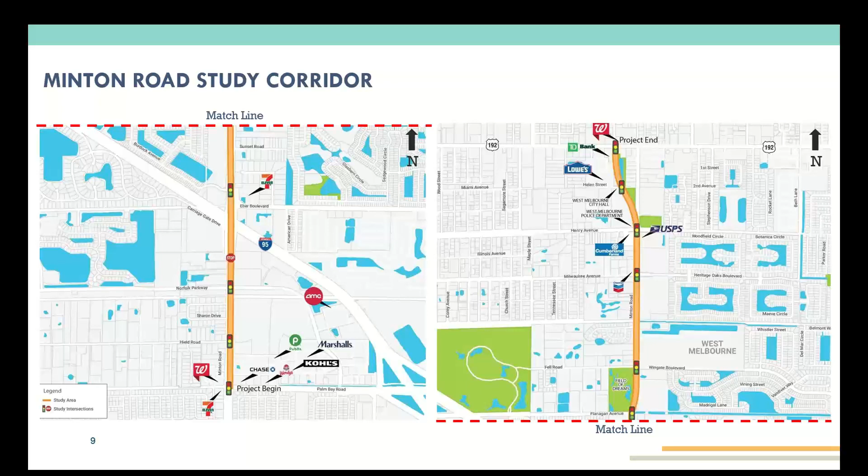So the goals of the project - the first one, right off the bat, was there was a potential need to widen the road from 4 to 6 lanes. There had been right of way, or property set aside, to be able to widen the road from 4 to 6 lanes if traffic volumes were high enough where it was needed.

We went through the process with our local agencies - City of West Melbourne, Brevard County, Space Coast Area Transit, and Palm Bay - and sat down with everybody to discuss what we want the future of this corridor to look like. Through that process, we determined that widening to 6 lanes isn't necessarily the direction we wanted to go.

Typically, your 6-lane roads are going to be higher speed, and they're less pedestrian and bike friendly.

They've been shown to have higher crash rates than other, maybe 4-lane facilities. So there was a consensus from that group that we were not going to explore widening alternatives at this time. We were going to really focus on ped-bike enhancements along the corridor, improving safety for peds, bikes, and vehicles, and also hoping to reduce congestion along the corridor.

We know that there are some hot spots, so we're going to do some intersection improvements to help facilitate that as well, which feeds into the second bullet. And then the last part, last but certainly not least, is enhancing those multimodal facilities throughout the corridor—pedestrians, bicycles, and transit.

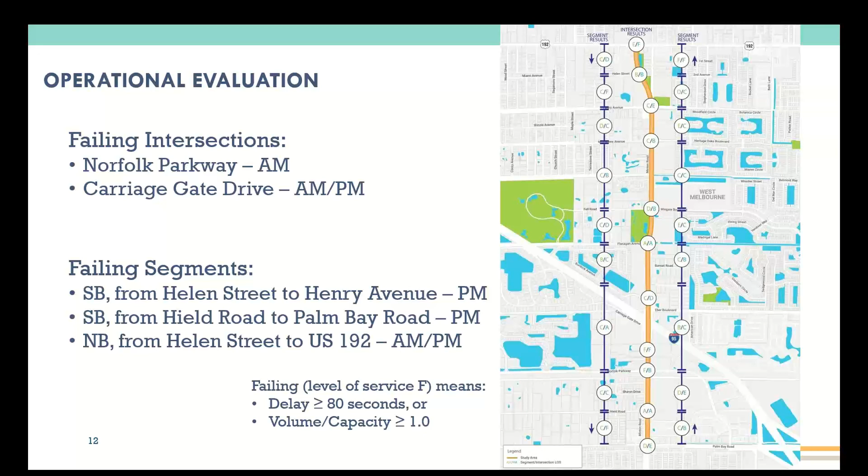We'll talk a little bit more about those issues here in a few slides.

So a little bit on crash history as well. Beyond the operations, we also look at safety data. We've had a little bit over 1,000 crashes. We looked at 5 years of data, from 2014 to 2018. Now you may be wondering, how is that significant, or is it significant? Is it not significant?

Generally, from what we've seen, the amount of crashes that have happened along this stretch of Minton Road are a little bit higher than what we would typically see for a similar type of roadway. This is also ranked 19th on what we call our state of the system report in terms of crashes at the segment level—top 19, I guess, in the county. So definitely some safety issues we want to try to address through this planning study and the alternatives we're going to move forward with.

One of the big things to note is that a lot of these crashes are happening during the PM, what we call the PM peak hour—5 to 6 p.m., when people are getting off work. We had about 10% of our crashes occur during that 1-hour time period throughout the 5 years of crash data.

And then a little bit on locations as well—these are some of our hot spots. As you would imagine, some of our bigger intersections show up. Palm Bay Road had about 260 crashes at that location. US 192 at the north end of the corridor was our highest crash location with over 300 crashes over those 5 years. Then we have a few spot locations—Hield and Helen Street, both close to 30 crashes. And really in the middle of the corridor, Milwaukee and Henry are two of our highest locations, with 46 and 81 crashes respectively.

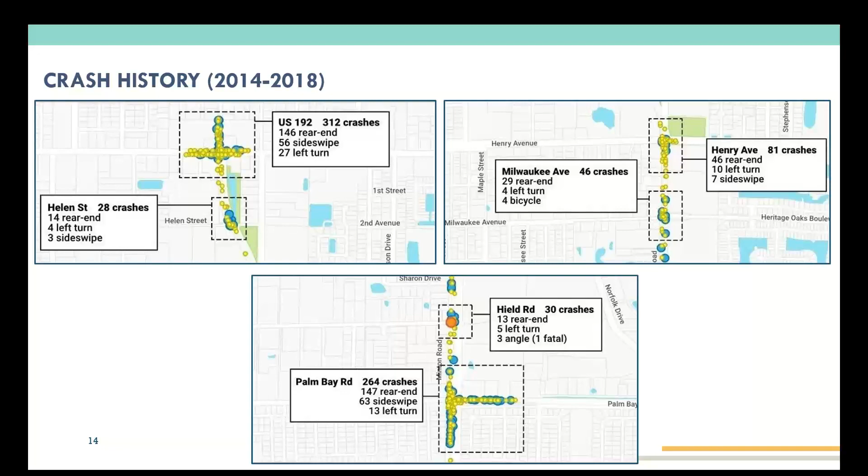So in addition to vehicular crashes, we also want to take a look at pedestrian and bicycle crashes, and see if there are any specific areas or locations we need to address from a ped-bike crash standpoint. Overall, we had 5 pedestrian and 10 bicycle crashes along the corridor. The big statistic that jumps out is that 9 of those occurred within crosswalks.

So these are folks either using the crosswalk on their bike or walking, and they're getting hit by a vehicle. Whether who's at fault, we didn't really get into that level of detail, but we do know those crosswalks are supposed to be protected and safe spaces for pedestrians and bicyclists, and that's where we're having most of our crash issues. Looking along the entire corridor, the Milwaukee Avenue, Heritage Oaks Boulevard location—that signal was our highest crash location from a ped-bike standpoint.

So we had 5 total crashes there. When we went out and did field reviews, it was also echoed by the crossing guards at that location that it's a very unsafe location, perceived unsafe location for pedestrians using that intersection. One of the crossing guards almost got struck by a vehicle turning left out of one of the side streets when we were out there observing it.

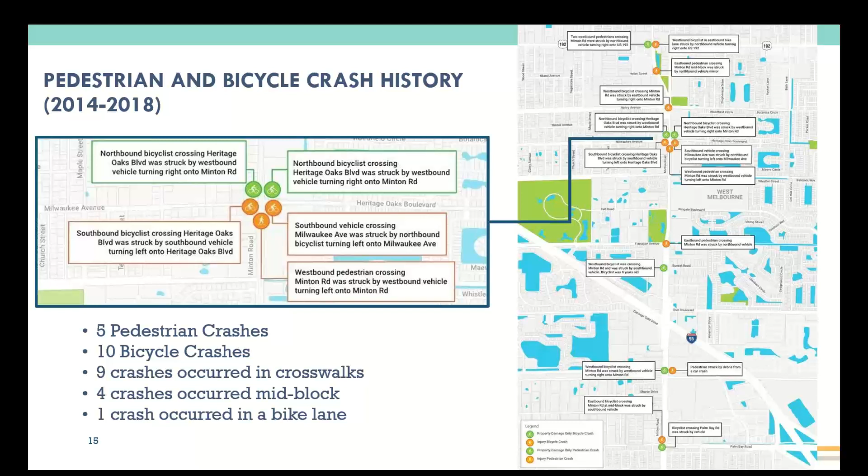And then you have a lot of kids interacting at that location as well. So it'll be one of the locations that we emphasize moving forward here, discuss later in the presentation.

So now, once we've gone through and done our existing conditions analysis, we identify issues and opportunities. And like I said, this springboards us into what alternatives we want to look at along the entire corridor. Starting with multimodal - pedestrian, bicycles, transit - we have what we call pedestrian mobility emphasis intersections, which also turns into mobility slash safety. Every signalized location along the corridor is going to be an emphasis for pedestrian safety and mobility as we progress further on the project.

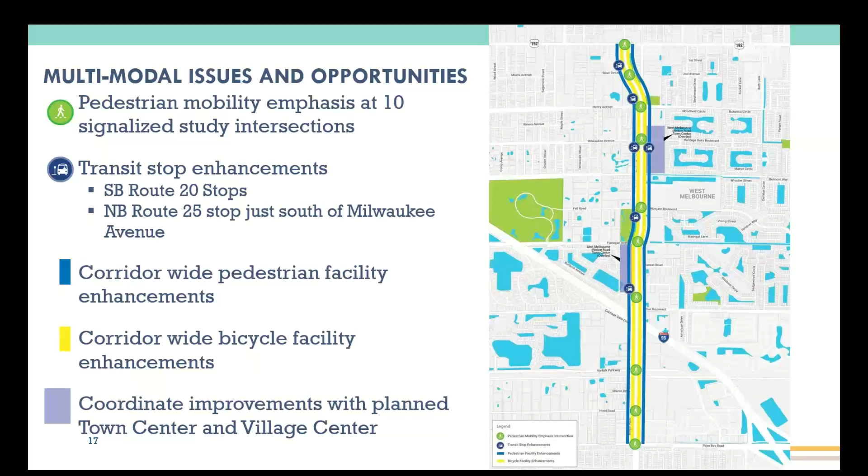Transit stop enhancements as well. There are transit stops along the whole corridor. West Melbourne does a great job of upkeeping those, putting out shelters. So we want to enhance those for whatever roadway alternative we want to implement along the corridor. Like I've mentioned before, pedestrian facility and bicycle facility enhancements as well - things we're also going to take a look at and talk about here in a few slides.

Some other issues and opportunities - we have some spot locations where we want to look at operational enhancements, and we've identified those. Then we have safety emphasis intersections - these are intersections with 50 or more crashes: Palm Bay, Eber, Henry, and US 192. All ones we want to emphasize moving forward in our alternatives development.

And then we think there's an opportunity for lighting as well. There are a few sections along the corridor that have recent lighting installments - they look really nice, really well lit, you're very visible at night. And then there are other spots where it's completely pitch black and you can't see anything. So we're hoping to implement lighting along the corridor as well.

On the vehicular side, like I mentioned, the queuing or congestion, the stacking where you're waiting at a signal - we saw a lot of that when we were out there. In the AM, going northbound, pretty much from the I-95 bridge up to Wingate, that was really one of your big problem areas with the school and the interaction with the school kids and the crossings going on there at the intersection.

And then in the PM, it's the opposite - you're going southbound, and it really all backs up from Palm Bay Road. That's what we were seeing in the PM. We also had some issues along Henry as well - folks were struggling to get out in the afternoon, going westbound to get out onto Minton Road.

A couple other things we want to take a look at are utilities and drainage facilities. Those are really going to play a factor into what roadway alternative - like I said, we'll discuss that here in a few slides - that we implement along the study corridor.

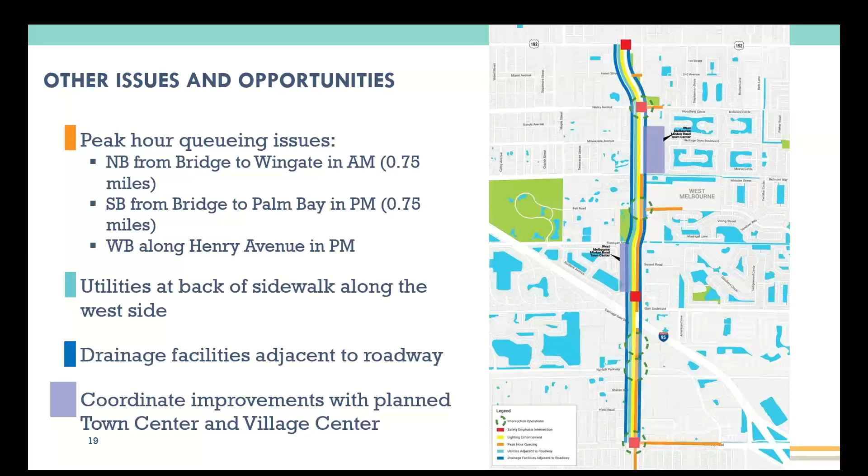So like I mentioned, we'll talk a little bit about roadway alternatives. Before I get into the actual alternatives, we need to explain what's out there today. If you drive this, walk this, bike this regularly, this should be pretty familiar to you - you have 2 lanes in each direction, 2 going northbound, 2 going southbound. You have what we call a raised median, and curb and gutter on the inside.

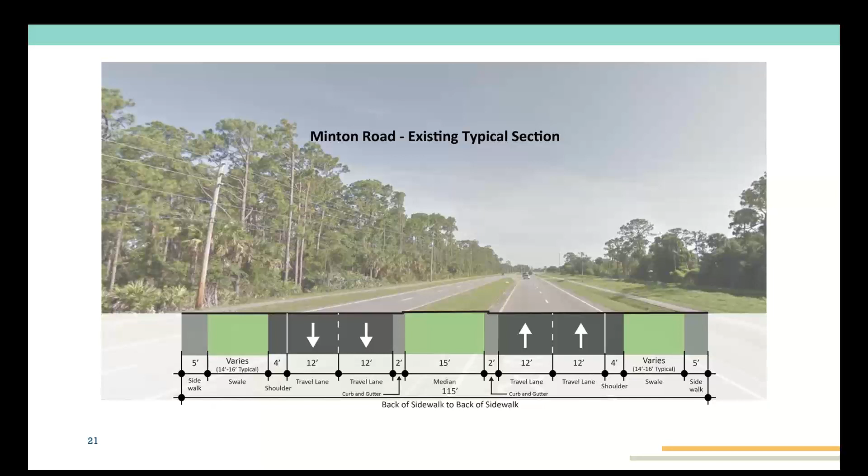That's the 2 feet curb and gutter you see there on the inside median. And then once you go to the outside, you have a 4-foot paved shoulder that then goes down into what we call a swale - this is where all of your roadway water, when it rains, drains off into this swale and then goes into drainage facilities along the corridor. Outside of those swales, you have sidewalks, about 5 feet wide in most locations along most of the corridor.

So what do we want to change? We have 4 different alternatives that I'll walk you through. Like I said, we'll go through the website here towards the end. You can actually get on the website and vote for what alternative you like the best or what you want to see implemented. So these are kind of critical slides that I'm going to walk through here.

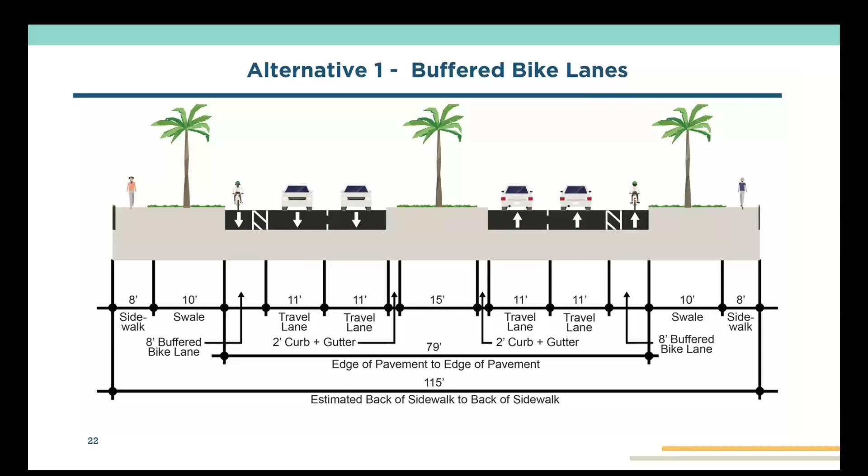Alternative number 1, buffered bike lanes. This is probably going to be the least impactful or least costly alternative of the 4. We'll build up to the most costly here at the end, but really the easiest improvement to make is to take that paved shoulder and make it a little bit wider. You're paving into the swale a little bit more, and then you're putting in what we call a buffered bike lane. That's just a bike lane, probably 5 or 6 feet wide. Then you have a striped out area between the bike lane and the outside travel lane, which provides a little bit of protection for that bicyclist. As part of this alternative, we would also be widening the sidewalks to 8 feet from the 5 feet that it is today.

Alternative 2 would be shared use paths. What this is, you'll see to the outside we've widened the sidewalk from 5 feet to 12 feet. This provides enough space to accommodate both pedestrians and bicyclists outside of the roadway. We know that with the travel speeds out there, it's posted at 45 but people are driving probably a little bit faster. We want to make sure we provide a comfortable environment for bicyclists, so we're pulling them off the road, keeping them separated from the vehicles on the roadway, providing that safer space for them to the outside.

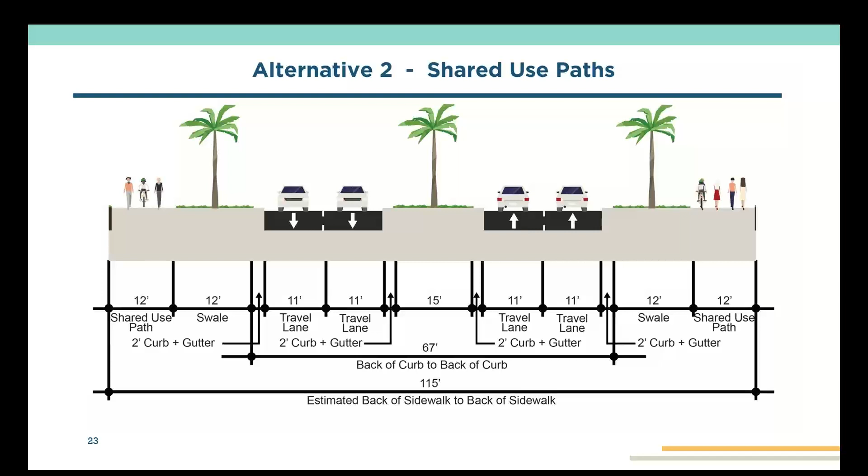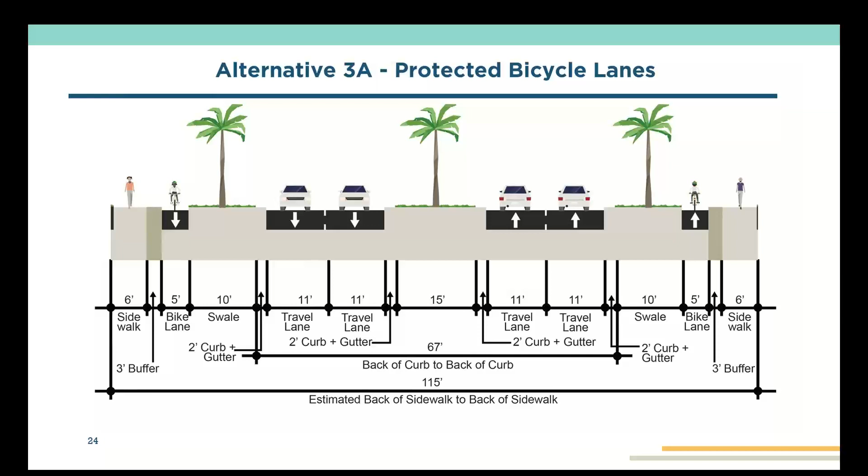Another variant, what we call alternative 3A, is protected bicycle lanes. What makes this a little different than the shared use path is that it actually provides a paved surface for bicyclists to travel at faster speeds. On a shared use path it's concrete, so you may not be able to ride as fast as you'd want or as fast as you could on asphalt in the roadway. This provides that 5-foot paved surface for the bicycle facility to the outside. You're on the other side of the swale, so you're still removed from the travel way. Then you'd have a separation or buffer between the cyclist and the pedestrian facility, the sidewalk, which would widen to 6 feet on the outside.

And because there was a 3A, there has to be a 3B, and this would be the cycle track alternative. As you'll see on the right-hand side, we have what we call a cycle track. This is a 2-way bicycle facility on one side of the road. It has enhanced bicycle features so that when you approach intersections or driveways, you as the bicyclist know you need to yield to vehicles, or vice versa, where if you're at a driveway the vehicles know they're approaching a cycle track and need to yield to the bicyclists.

One interesting thing with this concept is that we would shift it to either the west or east side of the road, depending on where we're at along the corridor. We were thinking about implementing this alternative just north of the I-95 bridge at Eber Boulevard. It would be on the west side, potentially connecting to some new town center properties that may be developed there. There are some vacant parcels, and the Field of Dreams parks on the west side. So you'd have that cycle track on the west side from Eber up to about Wingate. Then at Wingate you would cross over to the east side of the road and go in front of the schools along Minton Road, taking it from Wingate up to Milwaukee. What we were seeing is you'd want to connect the different land uses along the corridor on the west and east sides in those different sections, and also consider where students come from when they're coming to and from school.

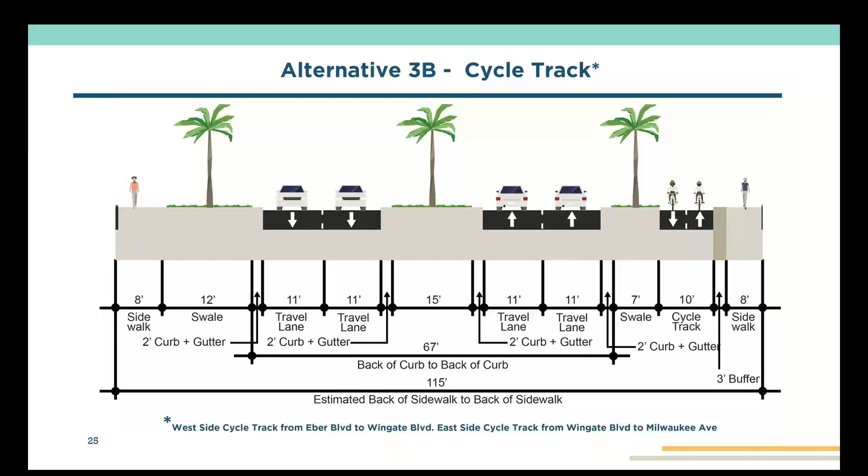For folks that may not know what a cycle track is, or if this is their first time hearing about it, it is a physically separated facility from both motor traffic, and it is separated from the pedestrian sidewalk as well. It is distinct from a sidewalk. You'll see from these pictures, you have that asphalt surface for the bikes, with striping for the bicycles, separated from the sidewalk pedestrian facility.

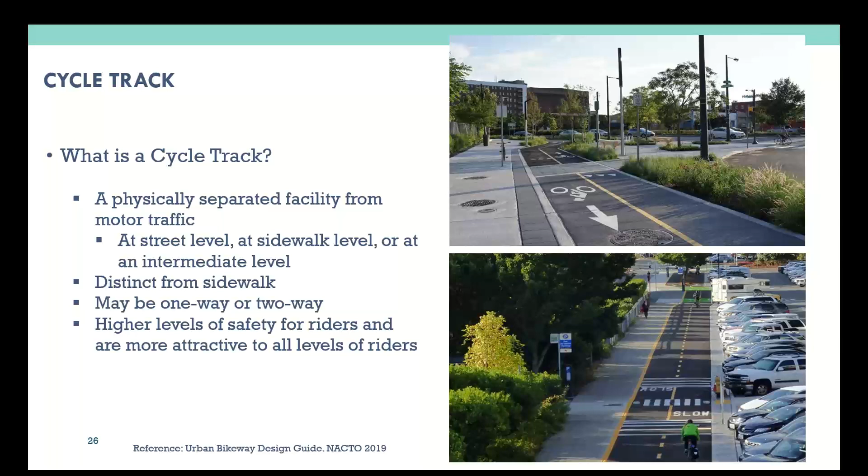Where we get into some things we're going to have to be thinking about - I don't necessarily want to call them issues, but things to consider as we move forward - we may need to purchase property at the intersections. We'll talk about that in a few slides on where those locations may be.

The drainage impacts are going to be pretty high for each of these, because you're going from an open swale to now having to figure out what you're doing with the water - do you put in curb and gutter to help close the roadway in, as we like to say. But there's going to be some drainage impacts with the different alternatives we're looking at.

Utility impacts are probably pretty low. Those are all outside of the sidewalk, and we're doing all our improvements within the sidewalk.

Like I mentioned, we typically present alternatives from low cost to high cost. So those buffered bike lanes, alternative 1, are relatively low cost. You add some pavement, all the way up to your cycle track or protected bike lanes, which are alternatives 3A and 3B, which are going to be more costly improvements.

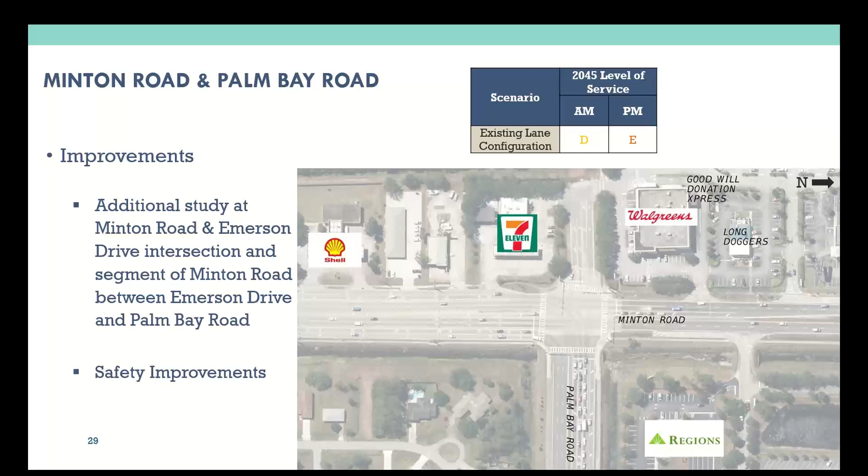I know that people don't like doing a study to recommend another study, but we think there needs to be a more comprehensive approach to looking at how this intersection operates within the Emerson Drive, Minton Road segment and intersection. So we're going to recommend a follow-up to do a more detailed analysis on that area.

So moving up the corridor to Hield, this intersection operates pretty well. Like I said, A is good, F is bad. This is level of service A when we're looking out 20 years in the future with higher volumes.

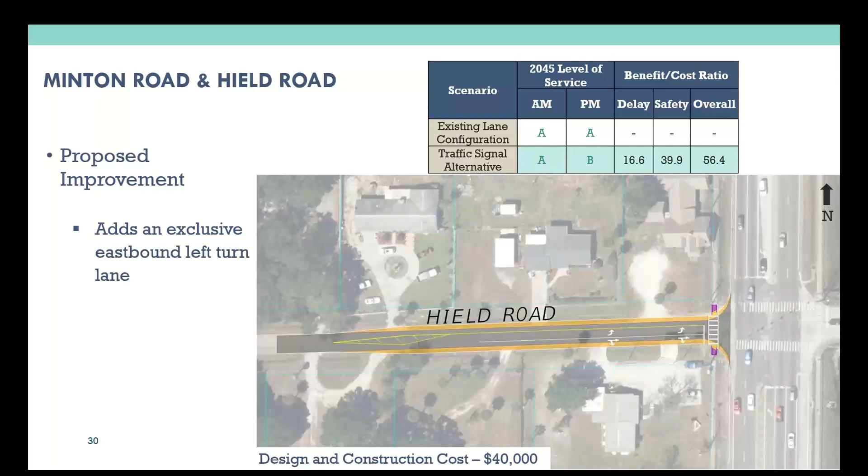There was a request by our local agencies to look at adding a new left turn lane for this eastbound approach. We've drawn that up here, you'll see it on the screen. We don't anticipate any right-of-way needed, which is great, so we'll be able to fit this within the right-of-way with pretty minimal impacts overall. It does actually enhance the intersection as well, so we'll hopefully be looking to get this incorporated.

So moving up to Norfolk, this intersection is potentially a very big location. There's going to be a lot of traffic volume potentially going through this intersection in the future. There's a lot of development going on out to the west, and so to account for all of that future volume, we're going to be looking to add a second eastbound left turn lane.

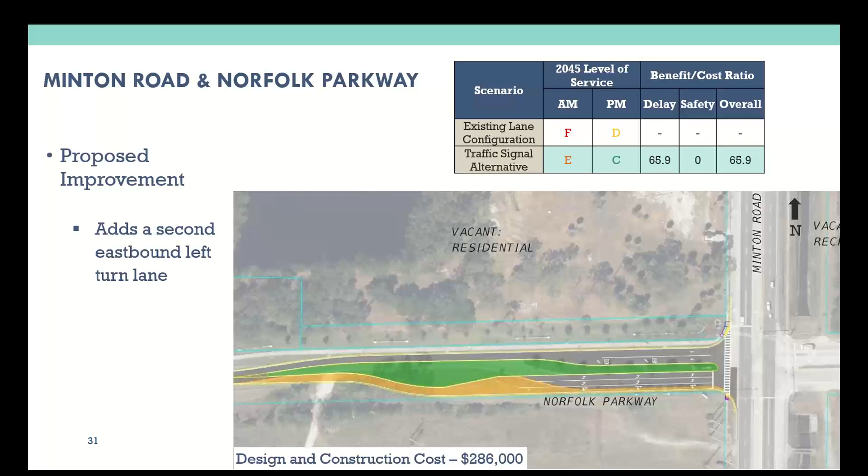You'll see everything in orange, that's essentially new pavement. We'd be shifting the road down to help line up those lanes a little bit better. And then as you approach the intersection, you have that second eastbound left that would help you go north onto Minton. As you'll see, it actually improves our operations at the intersection pretty significantly.

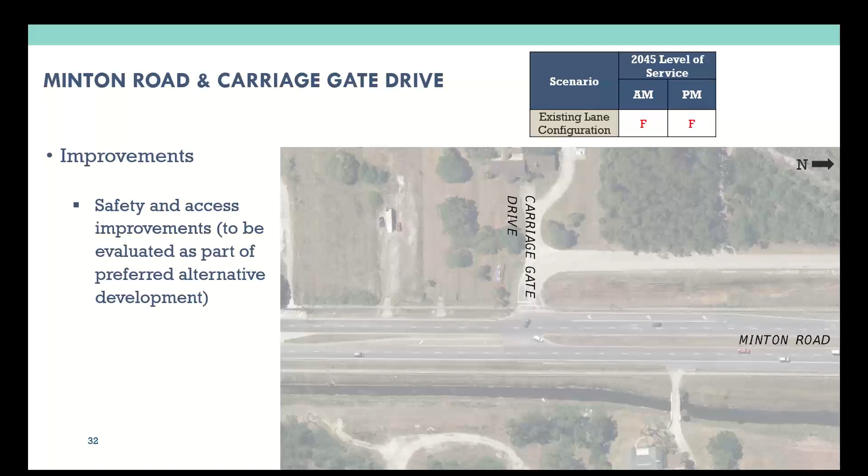So Carriage Gate, this is an interesting location. It's a tough intersection, being right at the bottom of the I-95 bridge. It's a location that we don't have anything really drawn up for yet, or a concept developed, but we are going to be looking at safety and access management improvements as part of the next part of our study. You'll be seeing more on that at our next public meeting early next year.

So Burdock and Eber, we are looking at adding another westbound left turn lane, a second westbound left turn lane at this intersection. That was identified as one of our critical movements at this location. It's a little bit tricky—you have those pretty significant 90-degree bends in the roadway, and some drainage facilities that we had to watch out for as well.

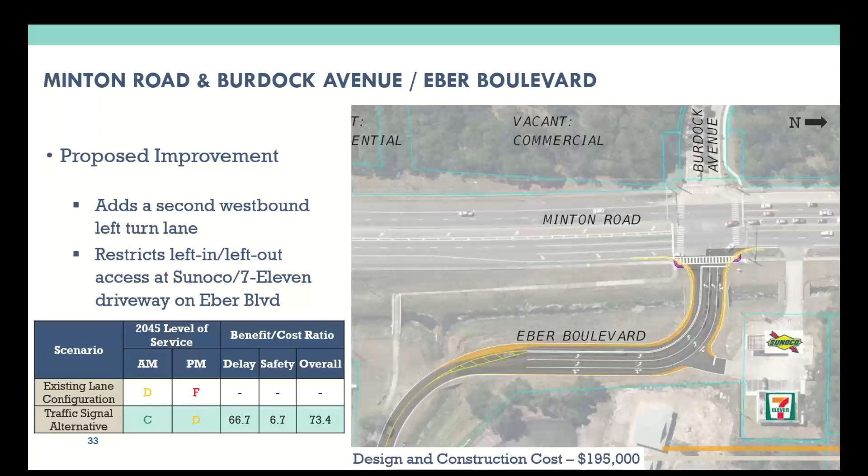But what we were hoping to do is add that second westbound left turn lane, and then add a 2-foot raised median between the left turn lane and the opposing eastbound through lane. That would help reroute some traffic and improve safety, specifically for the driveway to the 7-Eleven. Right now folks are making a left turn either to or from the 7-Eleven across the left turn lanes that are there today, and you have some sight distance issues because you're coming around a curve. So we want to help clean up that access and make it a little bit safer for folks going in and out of the gas station from Eber.

So what does that mean for access? We want to take a look at how we're impacting folks getting to and from their property. As you'll see, entering the 7-Eleven really doesn't change a whole lot. So instead of potentially using the driveway down on Eber, folks would then just have to use Minton to take the driveway located just north of the intersection.

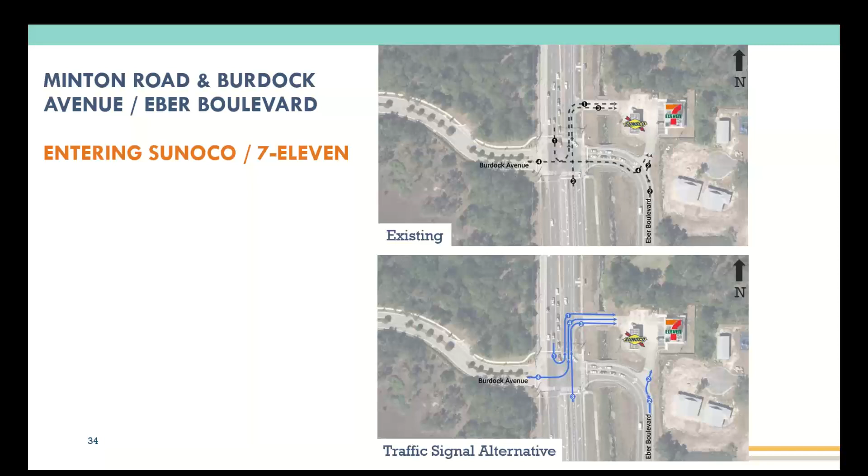Where it does play a bit of a factor is for the folks currently making the left out from the 7-Eleven to go east or south on Eber, away from Minton Road—folks who take a left, cut across those couple turn lanes, to then go south on Eber.

That median would restrict that access. Right now, we're showing a pretty conservative approach where folks would have to come out of the driveway on Minton Road, go up, make the U-turn at the next directional median opening, then come back and left turn at the intersection to go down Eber. That's a pretty conservative approach.

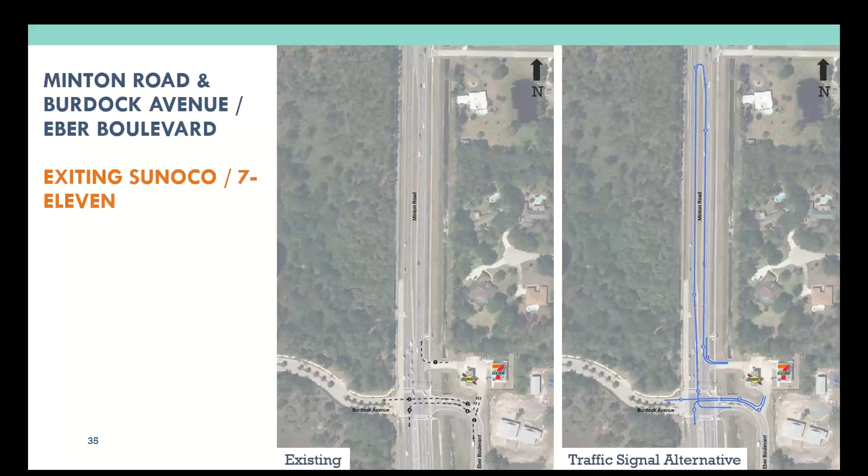We're going to look at some alternatives to help shorten that impact so folks aren't driving 10 minutes out of their way to go to the 7-Eleven if they're heading back down Eber Boulevard. So moving up the road to Flanagan and Wingate.

These two intersections were actually operating pretty well. The major issue at Wingate in the morning, and the reason for all the congestion, is the school. What's going on is kids coming up, and you're getting a pedestrian cycle where a pedestrian is using the crosswalk across Minton. Pretty much every single red light, there are pedestrians crossing, which increases the time to make it through that intersection.

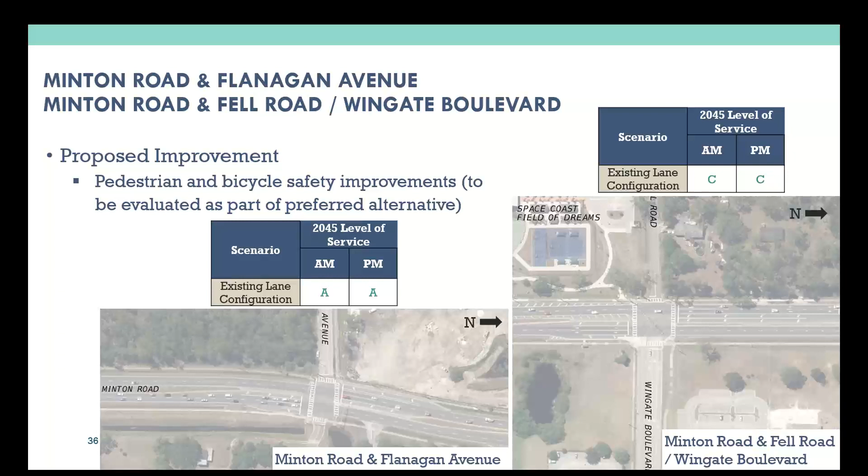From a turn lane standpoint, adding left turn lanes or doing different things like that, we weren't seeing much benefit to implementing those types of recommendations. So instead, we're going to focus on pedestrian and bicycle safety improvements at these locations, enhancing it from a ped-bike standpoint. Hopefully with all the other improvements along the corridor, it'll help enhance vehicle operations, and at this location we're really going to target that ped-bike safety.

So then moving up to Milwaukee. This is a little bit of an interesting concept, one most folks probably haven't seen before. This is what we call a restricted crossing U-turn intersection. If you drive through this intersection coming from Milwaukee or Heritage Oaks Boulevard, as the current concept shows, you won't be able to make a left turn out of those side streets, or travel straight through the intersection to go across Minton Road.

This provides a much safer intersection for all three types of users. For vehicles, it's much safer, and for pedestrians and bicyclists, it's also safer. As I mentioned, this was our highest ped-bike crash location along the entire corridor. While we want to emphasize ped-bike safety, we also want to help vehicle operations, and with this configuration, we do enhance those vehicle operations. We help out that ped-bike safety. Overall, it's a better concept for the intersection and for the location.

The one thing you'll see is when you make those right turns out, you'll go down to where those orange lines are for that turn lane, both north and south of the intersection, then make a U-turn to go back south or north. Essentially, instead of making a left, you make a right and then a U-turn to get to your destination. Those locations would be signalized, so you wouldn't be trying to make a U-turn with all those vehicles on Minton Road opposing you. You'd be able to get out and make the U-turn pretty effectively and efficiently, and it's a much safer movement overall for vehicles.

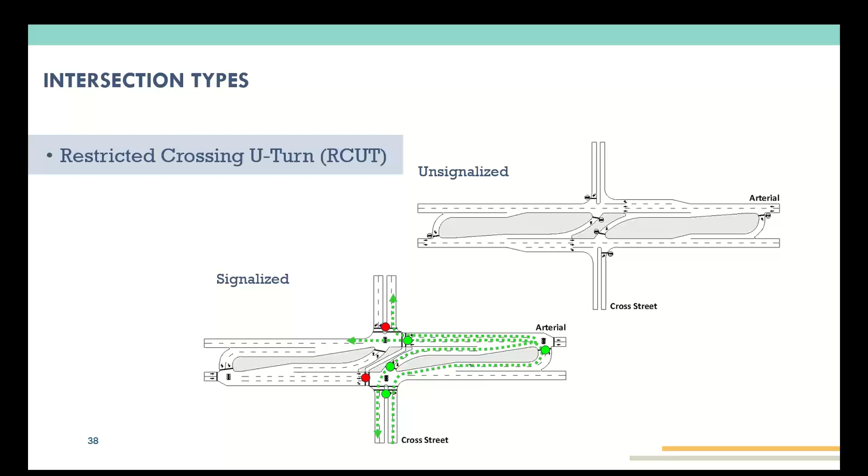Overall, it definitely increases your operational efficiency. Vehicles move through the intersection a little faster and easier because you're not being conflicted with everything coming from the side streets. You're limiting the amount of conflict points, which makes the intersection much safer as well. On pedestrian and bicycle movements, it's also safer — we were having issues with folks making left turns out of Milwaukee Avenue and Heritage Oaks Boulevard, either near misses or actually hitting pedestrians in those crosswalks crossing Minton Road.

So as you'll see, you essentially eliminate that conflict with this alternative. Now you don't have vehicles making a left turn out, so you don't have that interaction with pedestrians and bicyclists, and they're able to make it across Minton Road in one movement. You'll see in the middle that diagonal crosswalk striping, so they'll be able to make that movement without any interaction with vehicles. It really just helps the whole environment for pedestrians and bicyclists.

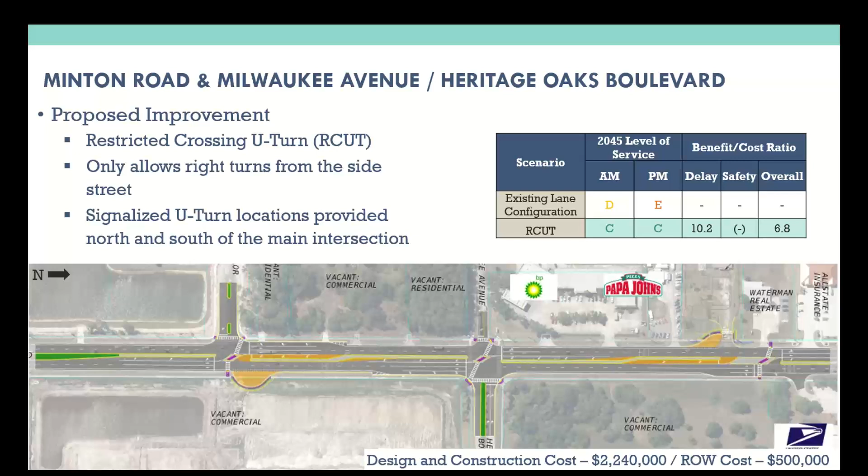The other nice thing is that for the U-turn locations to the north and south, those little orange areas also include pedestrian crosswalks. So we'd be adding more opportunities for pedestrians to cross Minton Road. It would be signalized, so it would be protected, providing that safe crossing as well.

All right, our last major intersection where we're looking to make improvements is Henry Avenue. As I mentioned before, the westbound was an issue in the afternoon peak hour. So what we're hoping is that we can add a second westbound left turn lane to help facilitate those movements. We would also provide some access management improvements for the USPS driveways that we have.

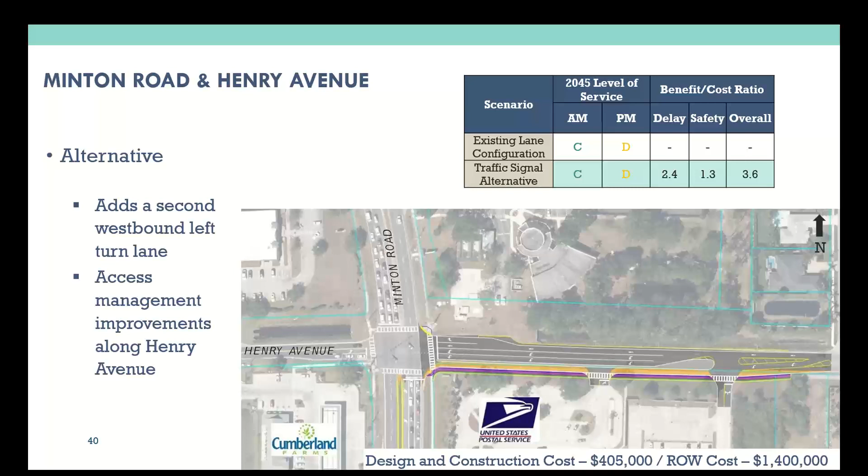You'll see in the graphic, it's a little hard to see because the blue line goes on top of it, but there is going to be a raised median as part of this concept. It would close access to that first driveway for folks coming along Henry from the east. So if you're coming westbound along Henry trying to make the left in, you wouldn't be able to do that for that second USPS driveway.

So we'll show some similar graphics like we did down in Eber, showing entering and exiting the post office. Entering really won't be much different except for folks coming from the east along Henry. Instead of being able to turn left into the post office, you would have to come up to Minton, hang a left, and then turn left into that southern USPS driveway along Minton Road.

There isn't a median opening now, but as part of the R-cut, or restricted crossing U-turn concept down at Henry, or down at Milwaukee, we would be able to add another opening here for that driveway to facilitate that movement. So we'd be able to combine the two alternatives to help facilitate access and maintain access to the U.S. Postal Service property.

And so exiting, really not much - there are differences. You won't be able to make the left out from that driveway along Henry, but you would be able to come out of the driveway down south on Minton. That would be signalized as part of the R-cut concept at Milwaukee. Then you would be able to either turn right and go north on Minton, turn left on Henry, or make the U-turn to go south back down Minton.

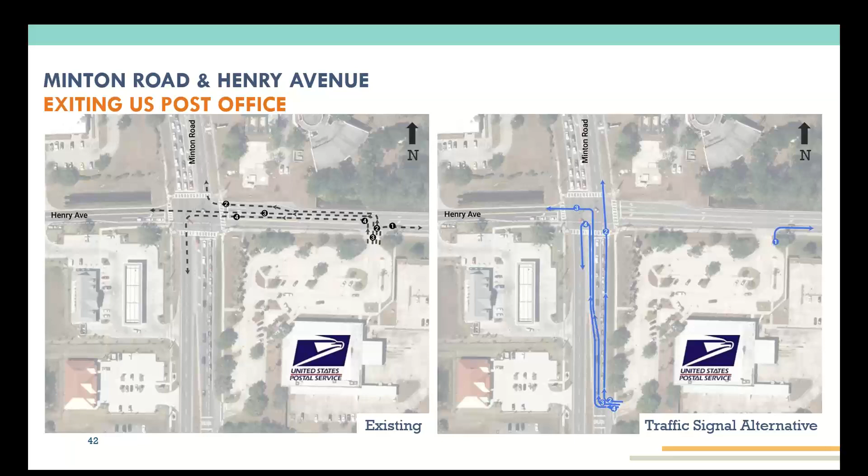And then the last two of our study intersections that we're going to be taking a look at, Helen Street - this one didn't really have many operational issues from a vehicular perspective. We think that we can enhance the pedestrian and bicycle facilities at this location, really place an emphasis there as well.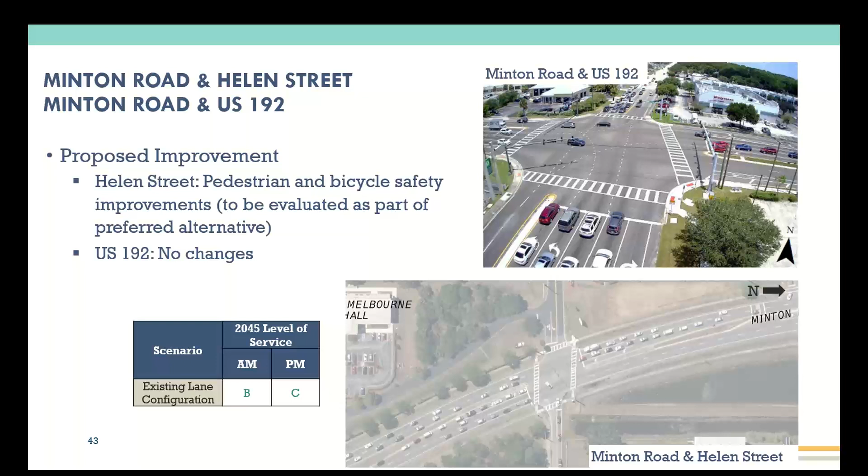As most of you probably know, US 192 underwent some major renovations, a bit of a facelift a few years ago. It was under construction for a while and added a bunch of turn lanes. So that intersection, we're not going to go back in and touch it. There was a lot of work done, a lot of money put into that, so we're going to leave that one alone and let it ride its course.